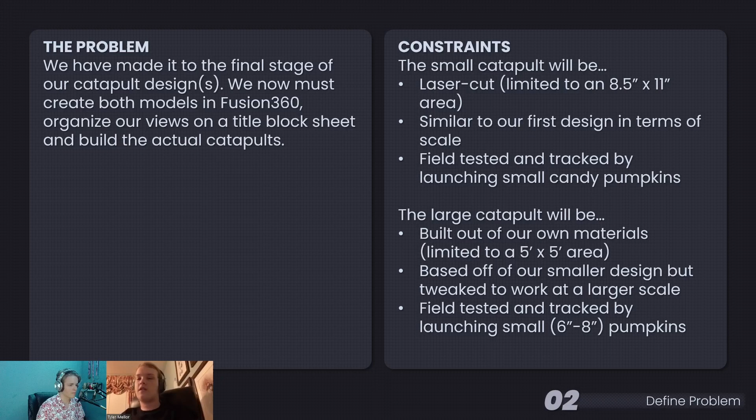The first problem was to make a much better version of our first, smaller designs. The second was to make a much larger design that fits within any 5 by 5 foot area, so it can't be huge, and it has to launch roughly 6 to 8 inch pumpkins.

This is Max's design. He isn't here to join us today. I sent him an email and everything, but he didn't join, so he's not here to explain his design. It looks very interesting, and I'm sure he would be able to explain it if he was here.

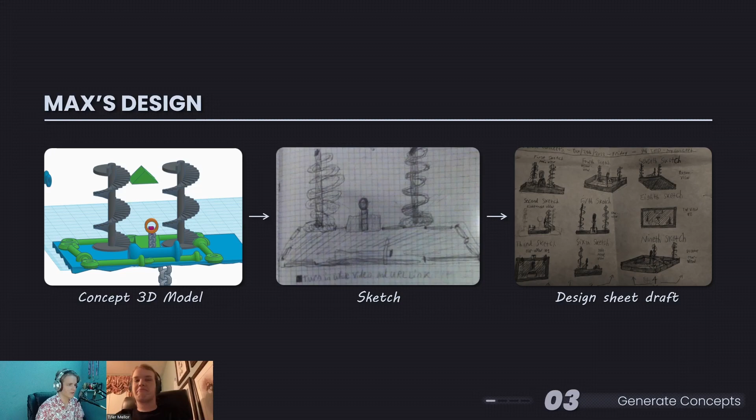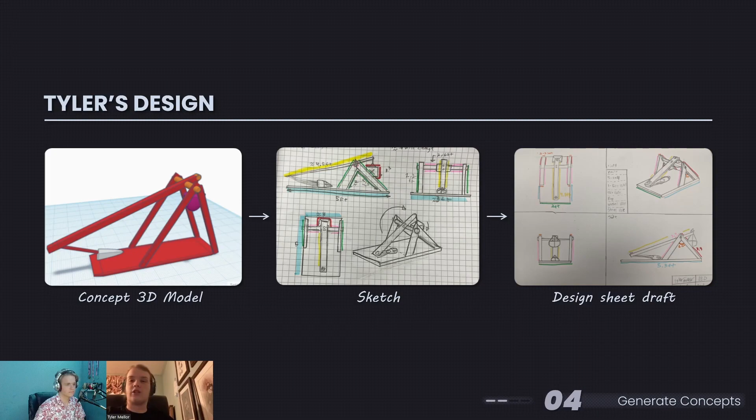This is my design. Basically, a normal trebuchet uses weight to launch the thing, but it has a twist where the chute actually opens to get as much momentum as possible.

And this is my design. I had this little 3D model I made in Fusion 360 - doesn't look amazing, I was just playing around with things. Then I sketched it out in my journal, and in the very end I made a design sheet. This is actually sort of Tyler's model, but I made it my own and put it in Fusion 360. That's my final design sheet in the end.

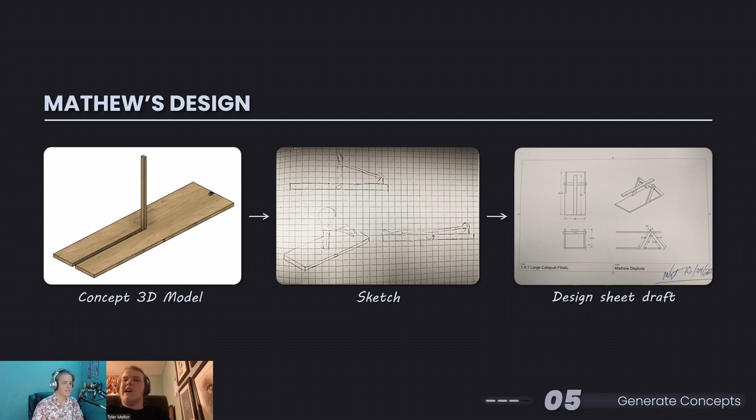First we have my design, which I tried to make as simplistic as possible. Mathew's design is a lot more clear cut when it comes to 3D modeling, and then Max's design, who is not here to explain.

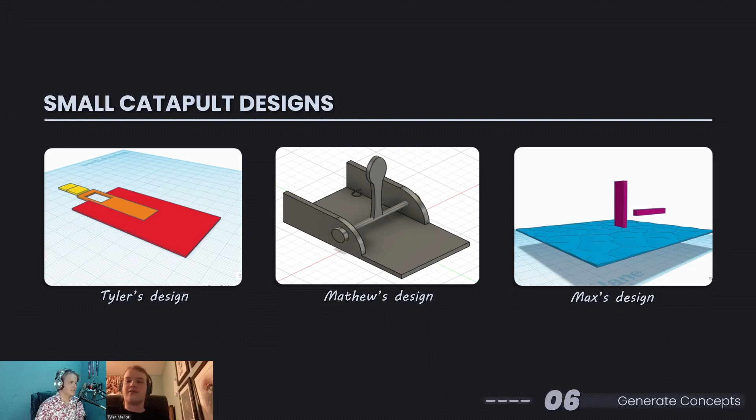These are the small catapult designs, by the way - these are separate, not the big ones. The plan first was that Mathew's design would be used for the smaller catapult, since it would be much better for that area. Then my design, the trebuchet, was going to be used for the big one. That was changed later, but we'll explain that.

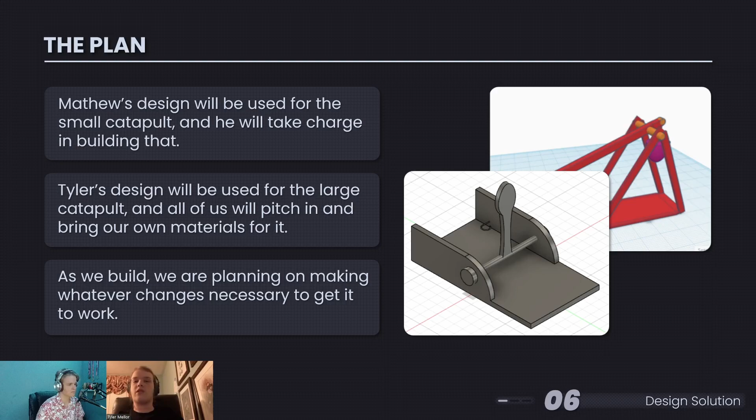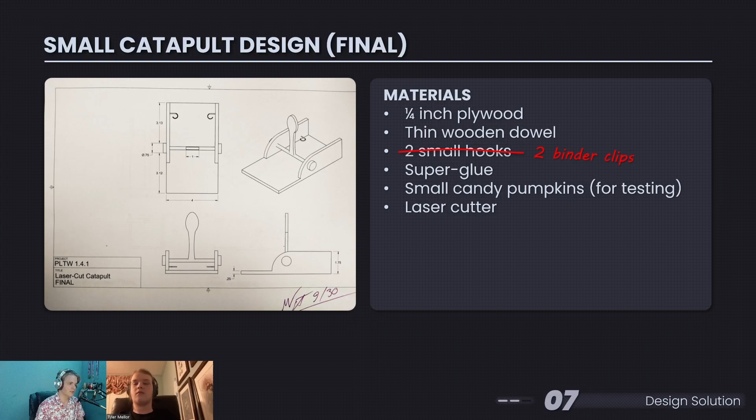So this is the small catapult design. There's not too much notable in the materials here. The only thing you need to know is that later on we changed the small hooks into binder clips for better security. We used super glue, and for most things we actually used hot glue as well - I didn't list that here. It came out pretty similar to how this design is.

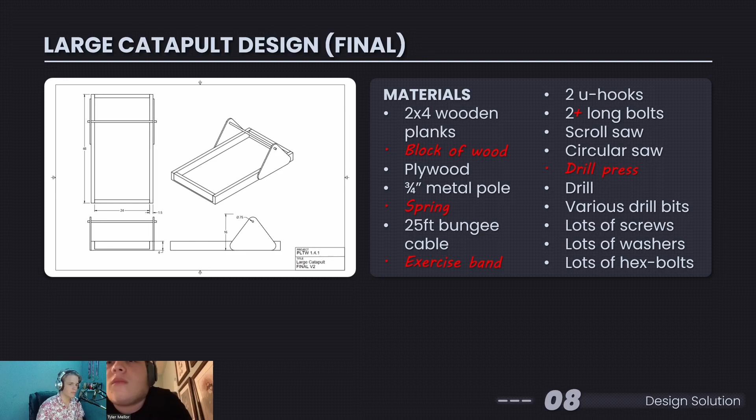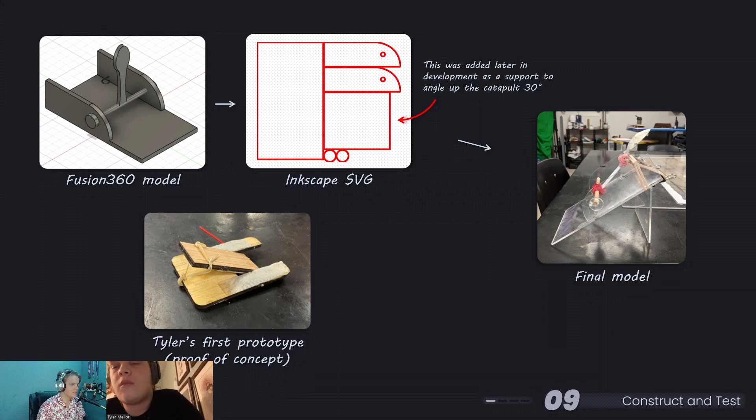So this is the small catapult. You can see we started with a Fusion 360 model, then went to an Inkscape SVG. This little square here was added later in development to make the catapult point up 30 degrees, to put on the bottom, as you can see right here on the right. Tyler's first prototype is down here as well, just to show that was the first thing we had before we did anything.

So now the large catapult - how in the world did this 3D model design become this actual catapult? One thing you might notice is that the base was actually thinned out, which made it a smaller design. It wasn't as big, and it was easier to carry.

We moved the outside plywood cut pieces to the inside. That helped a lot with structural support. Mr. Rowe actually suggested that - I think, or no, we did that, but Mr. Rowe said it was a good idea.

We used a metal pole that's de-rusted with an angle grinder, and pipe connectors to hold the arm in place. The arm is just another cut 2x4. We also have a custom launching mechanism and a custom thing where you put the pumpkin on it - we'll talk about that later.

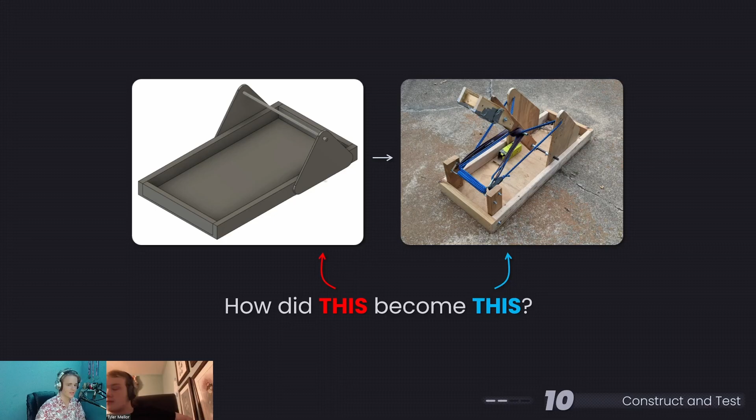In particular, I want to highlight this spring and latch mechanism - I have a little flow chart on the side here. We drilled a 1 1/4 inch hole into the block of wood and secured the spring into that hole. We loosely screwed in a metal plate to pivot around the wood block, so you could press it all the way down on the spring and latch it in place with the metal thing. It works really well - we just attached a little string to it. That was actually Tyler, so thank you, Tyler.

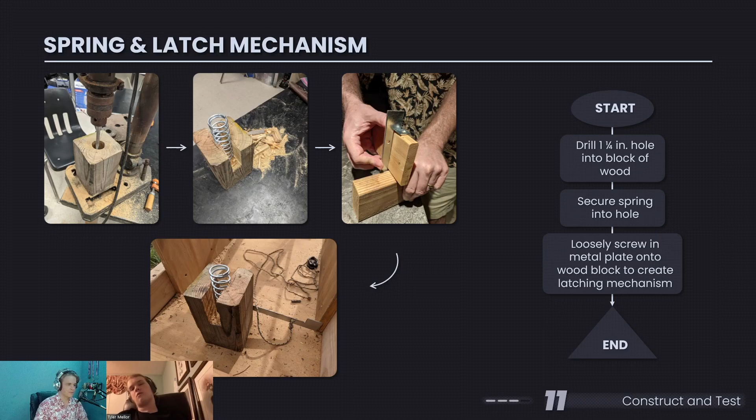Finally, we have our results from the competition we did today. I won't go through everything, but we got an average of 7.7 meters, or 25.3 feet, and we had the best accuracy out of everyone. You can see how we did right here on this chart.

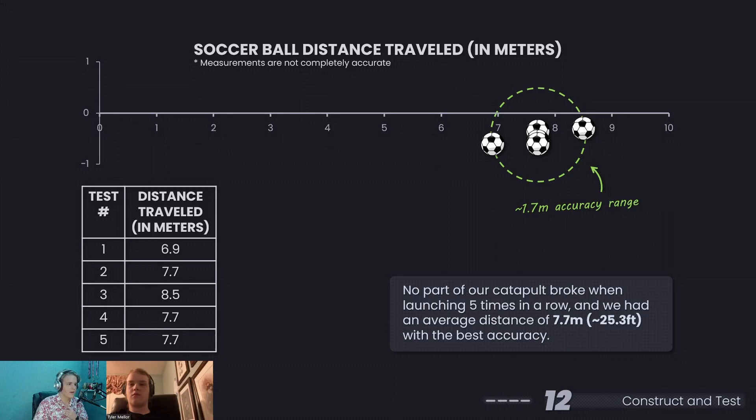Our reflection is, if we were to do this differently next time, we'd do a much better job communicating and coordinating, and we'd collaborate more in the actual building part. But we're all very proud of our work, and it was a great project to work on.